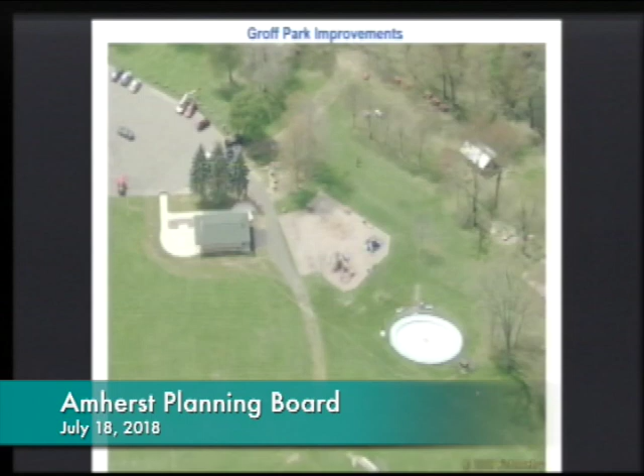The proposal is for, as Nate mentioned, in this midsection, there's the existing park building, the existing playground, and old wading pool, which has since been removed by the town. The project is basically on this plateau. Let's flip through some of these. I'm sure you're pretty familiar with the site, but one of the features down below is the old picnic pavilion, which is proposed to be replaced.

Handicap access from the parking lot is non-compliant, I'll put it that way. So part of the park proposal, wanting the playground area to be fully accessible, includes improvements for handicap parking and access.

So let's get to the plan. We'll get you oriented first. This is the existing park building, and down here is the location of the existing picnic pavilion, which is proposed to be replaced. But starting off at the arrival, we're proposing to repave this corner portion of the parking lot.

Paving for the parking lot would actually be reduced. We're going to reorient the parking spaces so that you pull in head on to the arrival. This is a small arrival plaza into the park.

As you continue up, the grade would carry you up to this level slightly. It's about a 3.5 foot difference in grade from the building back down to the parking spaces. We had to actually raise that corner of the parking so that we could meet accessibility requirements.

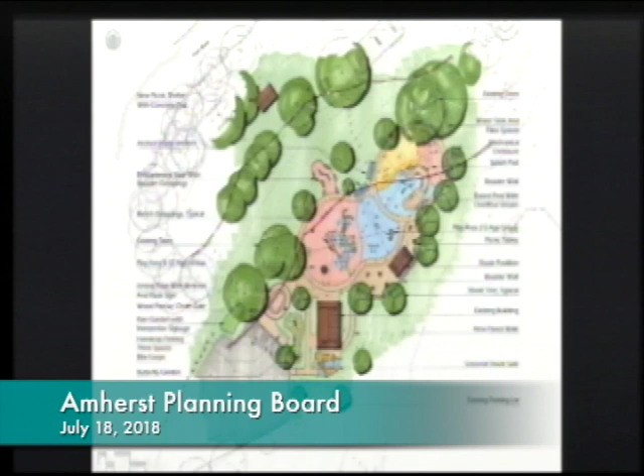And then next to it, under this tree, there's this little square, the existing sandbox, which a lot of people have said is one of the favorite things at the park. So we're really not doing anything down at the lower level except, if the budget allows, replacing that picnic pavilion, because it's old, worn out, and it's been repaired too many times.

Other questions or comments? Questions or comments from the public?

Back to the board. Chris? We received a letter from Susan Sheldon. You may wish to hear from her. We do have copies of the letter here, but I don't have enough copies for all of you, so I can pass these copies along. Perhaps you wanted to recognize Ms. Sheldon to make her comments? Yeah, sure, if you would.

Hi, I'm Susan Sheldon, and I live on Mill Lane. I'm a landscape architect, so I'm really fascinated with your project, and I have some great ideas. I love it. I also have some comments about it, but that's not why I'm here, to comment on your design. I think you might have another letter from one of my neighbors on our street, Kathy Mullen. She lives closer to the entrance to Groff Park, and since she kind of spearheaded disseminating this information to our street, I'd like to read her letter, if I may.

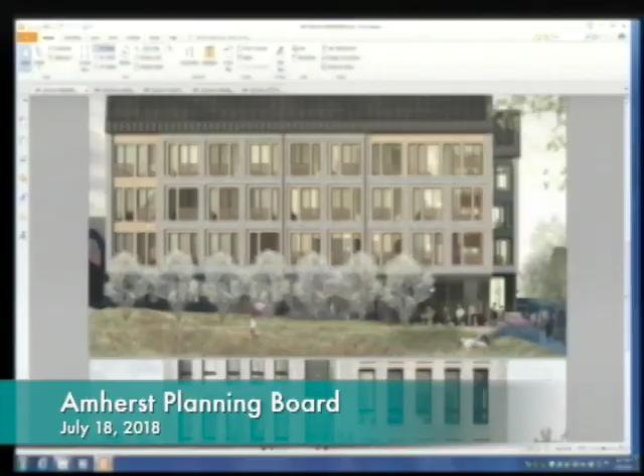The building inside, I'll stay here for a minute and then I'll go inside. So this is the grade, this is the south elevation at pedestrian level. So this is the lobby entry, which shows a fireplace in the lobby. Again, that's at 290. These are steps up to the retail, again at 293, up to this space.

And then this is the outdoor portion, the patio. We have pushed this portion of the bar back further so we can plant against this patio, and doing so allows us to eliminate the need for a handrail that would have to be at the street side.

And then we've tried to take the granite wall that was installed at Grace Church when the town lowered Spring Street, and take something similar across the face of this, which is a granite veneer stone that is a landscape wall in this location, and turns into an architectural wall, a veneer on the building on this bar here.

This is the site plan from above, showing the photovoltaics on both the east and west portions of the roof, everywhere we can. This is showing our building coverage, and this is showing our lot coverage.

The building itself has changed in that the number of units have gone from 38 to 58, and the unit types have shifted. This is our first floor plan that starts to show some of those units and shows our lobby, package room, stair, elevator, fireplace, the retail, which has grown a bit from the currently approved plans, a fitness center, and this is kind of the back of house that then takes you out here.

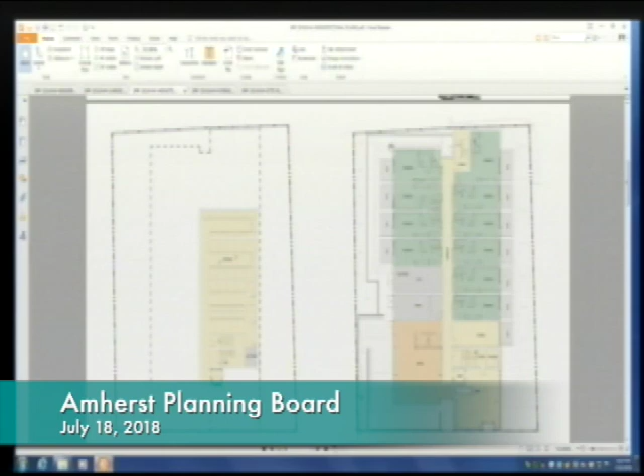So let me try this. This is the egress out of the second stair, which is now coming around the west side of the building and wraps and comes down to this stair.

So the shift in the units has, as you'll see up here, we have a number of one-bedroom units. We have 6 one-bedroom units that face the street, and we have 52 studio units that are of different sizes depending on where they are in the building.

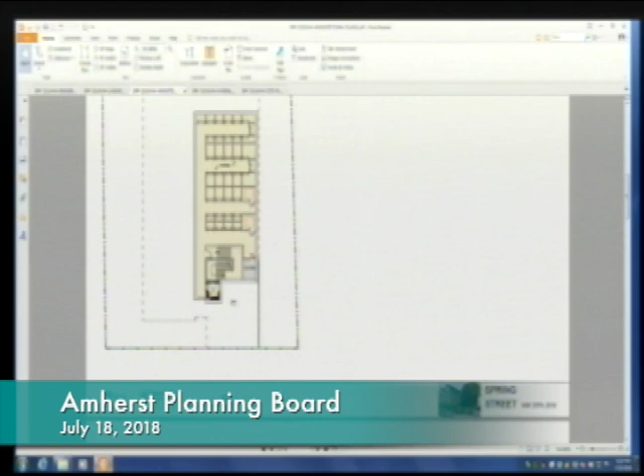On the ground floor, we have gotten rid of the parking that was previously shown below, and in place of that is storage for the residential apartments. The patios outside of all these ground floor units are shown here on the sides, and that takes us up to the building and lot coverage calculations, which are shown here and included in our application.

The total building coverage is 63%. In BG, we're allowed 70%, I believe. And the total lot coverage is 76%, where we are allowed 95% lot coverage.

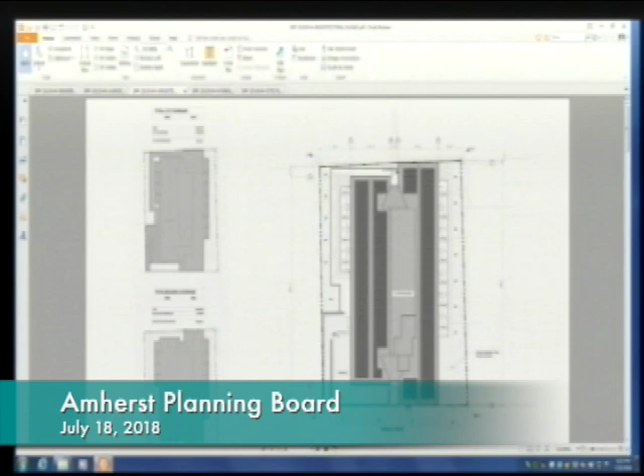The setbacks, which we have discussed with planning staff, the building setback on the street is a 0 setback. There is an eave up at the roof that will project over the property line, and a canopy at the entryway, which we'll have to reconcile with the select board.

On the back, this back corner is a 0 lot line to the face of the building, and what we are going to be doing here is we are not going to have an eave on this back bar of the building. So that will be flush all the way up, so that zero setback is a by-right condition in the bylaw.

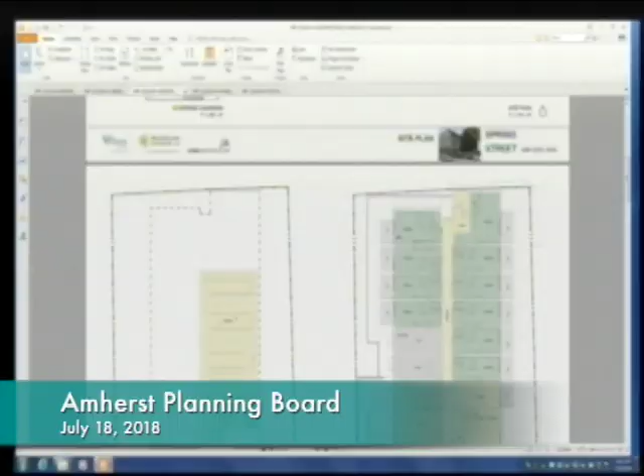The upper floors, you'll see this is the first residential floor. Let me go back here so I can clarify this. This lobby is the 290 condition. This retail is the 293 condition, along with the back of house, side of house here. And then the 296 condition is this entire corridor and these units, including the fitness center, all up at 296. So those are the three slabs that work together.

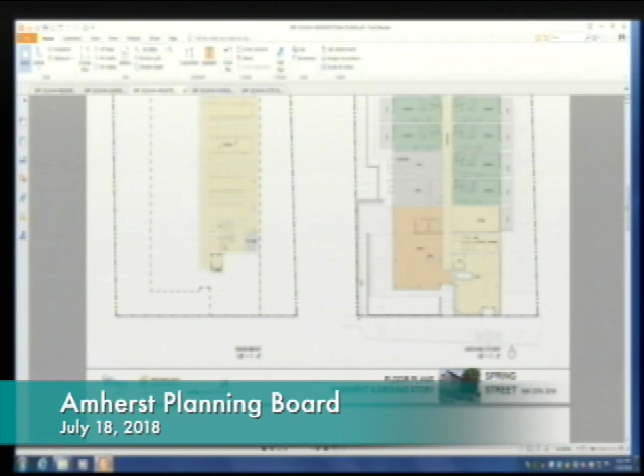The third and fourth floors are identical. The second and third floors are identical, and this is the fourth floor, and as I said, we've gotten rid of the fifth floor in this proposal.

So on the roof, you'll see the gables here. It's a 12-12 pitch, so it's a 90-degree angle at the top of the gable. That same 90-degree angle, with the 12-12 pitch, is represented on the roof facing the street and the roof facing north, and what that does is creates a well for the mechanical system: the generator, if needed, the fresh air ERV, HRV, and the condensers that would go with the split units that heat and cool the building.

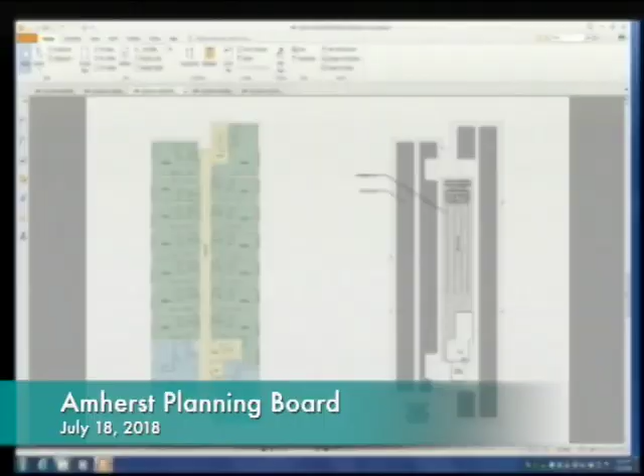There is an elevator overrun here, and then the hot water is either going to be tucked into this penthouse or in the basement, all electric hot water.

These are the rendered elevations. You'll see this is the south side facing the street. You'll see the materials called out where we've got brick that we brought a sample of, cedar, fiberglass windows, a standing metal seam roof, the storefront system, and the height is represented as 56 feet 3 inches to the midpoint of this 12-12 pitch. That is from the average finished grade at the street at Spring Street, so we've shown that in all locations.

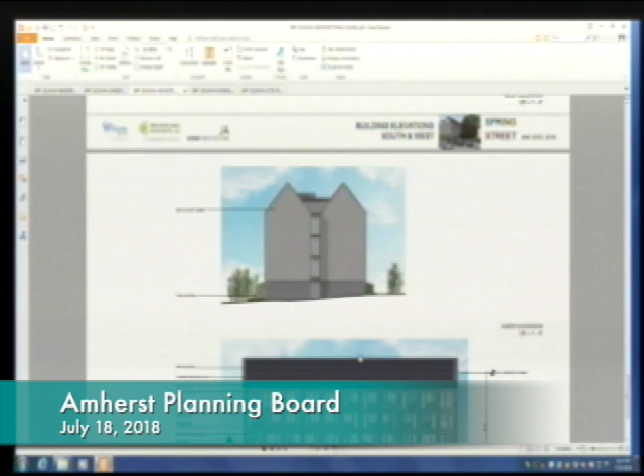So you can see we've been able to integrate plantings on the east side and plantings along the west side, as well as plantings in between the units on the patios. The west facade shown here, you can see that big grade drop-off from the back of the site all the way down to the street. You can see the north facade, which is zero lot line, and then the east facade, again with plantings and the patios.

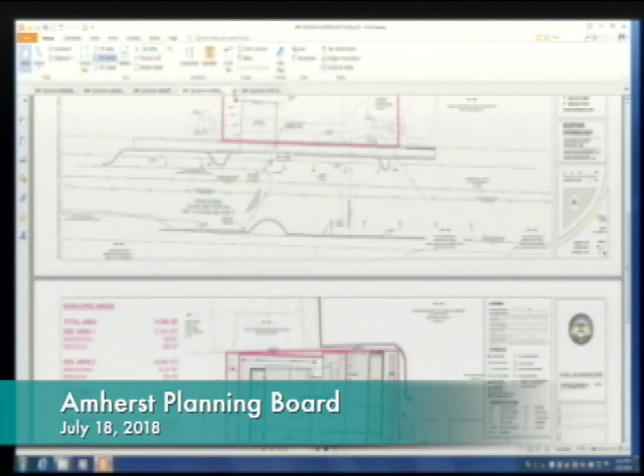Let me go to landscape. So here is the landscape plan. The landscape plan shows what we're able to do

by eliminating the dormers. The currently approved plan has integrated downspouts in the wall assembly, and we've brought those out and exposed them, and we're going to actively work to try to integrate the civil and the landscape to use these planted areas as a swale on this side, and then for our retention on the west side.

So we've got a swale along this east property line that's planted, that drops all the way down here where the grade drops again down to the street. It's planted here along the street side and planted here. That same planting is brought over.

We've got a paver that would be similar in color and material to the granite landscape wall, with a running bond pattern that brings you up the ramp, and an area for potential outdoor seating for this retail. It turns into a concrete walkway for the egress path out of that back door, and then the planted shrubs along that west elevation.

This is an outdoor lighting plan that shows the integrated lighting on the retaining wall. That's all down lighting in the wall that would provide the required foot candles for the egress path outside, and would also be in this grade height retaining wall along the ramp, facing west.

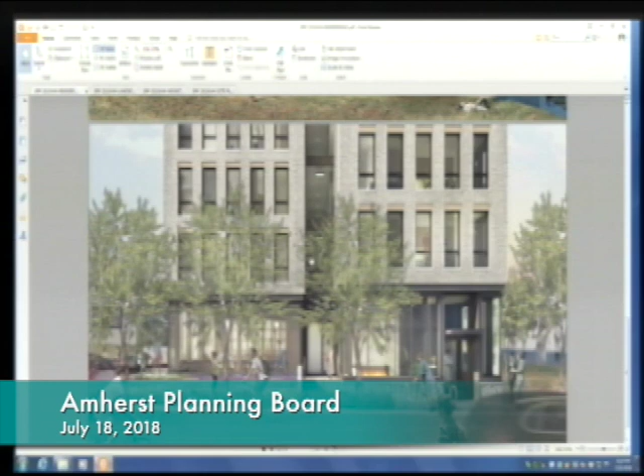Another thing that we spent a bunch of time on this iteration is looking at this corridor. The corridor for floors 2, 3, and 4 is open on both sides, on the south and the north. And one of the things that we're noticing in the buildings that we're constructing now is those corridors can become almost too bright. In a situation like this where it's open on this end, we wanted to see how far we could take that.

while still meeting building code and egress requirements. So we've looked at a darker interior finish and then a lighting program that's going to allow just above the required foot candles for the egress and corridors up above, and then lighting at the unit entries for the doors, so that if any of us walk past in the middle of winter and look up, this is not as bright as the lights that will be coming from residential units.

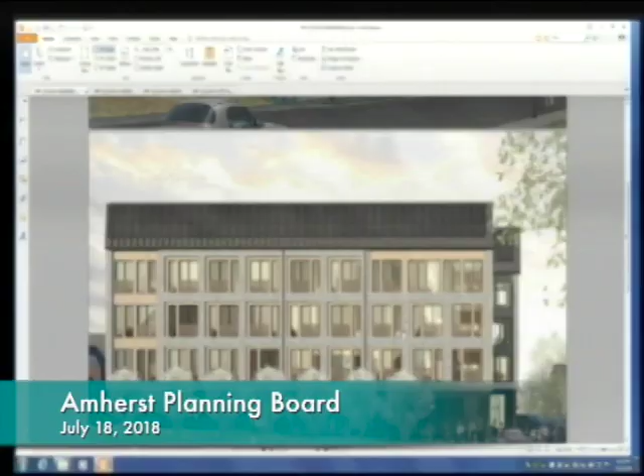Let's see. Civil, so this is the existing condition. This is showing the bounds of the property here. This is the retaining wall when the new police station went in that was put on the property line.

The little shed that the police station has is in this location right here, on the police property to the north of that retaining wall. This is, what's the name of that? Parish House. The Parish House at Grace Church. That is to the west, and this is the Jones property to the east.

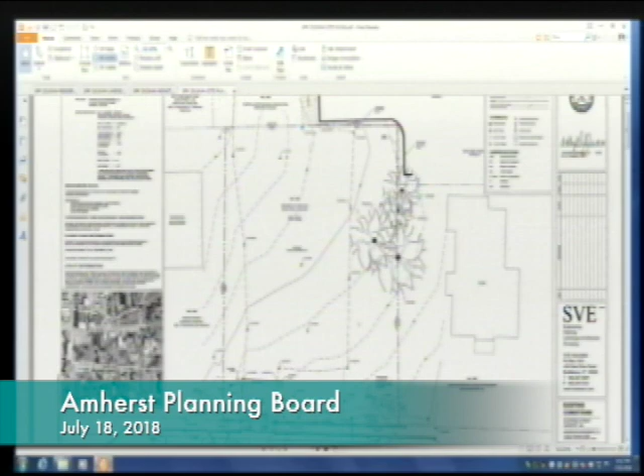These are the trees that we have previously discussed in coordination with the ownership here. This one is ready to come down anytime. With this new plan, without the underground parking, we'll work with them to see if they're interested in preserving any of these trees, because there's an opportunity to potentially preserve those since we don't have to excavate for the foundation as close as we did previously.

This is showing the proposed site plan. I'll go to the utility plan. That is showing grading and utilities, where we're going to have to work with DPW as we've done in the past to tie into sewer lines, to grab the water lines — there's a hydrant that needs to be moved.

Moved from on the property to the right-of-way. I believe all of those are addressed in the letter that the town engineer submitted, and we're showing this proposed public right-of-way improvement that would integrate the storm, potentially integrate stormwater connections.

I did bring one of the things that was brought up at the design review board last night, which was context, and that's what I have on this flash drive. I have a couple of printouts here that I could give out.

We've submitted these previously, but they're the 3D Google images that show this block and our approach with this building, with the gable roofs and how it sits on the site, trying to be in keeping with the larger buildings on this block — this building obviously being one of them, Town Hall, the police station, Grace Church.

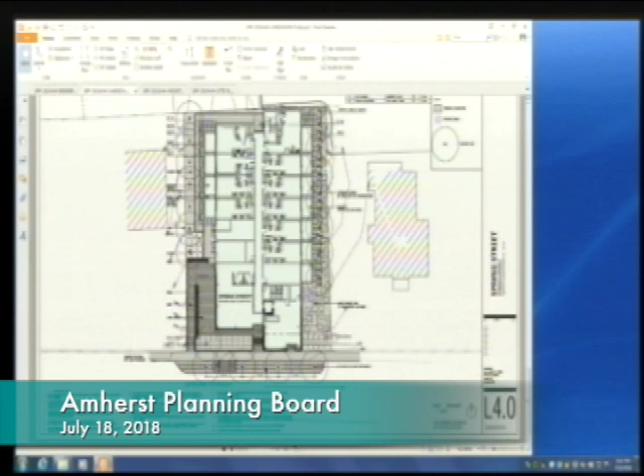So you see where the sidewalk is, which is public way, but then they're asking for more public way to make a big bump out to plant green, but you lose 6 or 7 parking spots. If you got rid of the extra bump out, you could still maybe configure or use just a little of it and get a couple trees, but I'm also proposing they have a new design where they put a tree in the green space on their terrace.

I think there's a couple of different options that can be done. But I definitely think all of us would like to see the wires come down, obviously. Of course, but I think the trees are still open to other options.

And just to be clear, the current condition has a driveway, so there's no... this is the light pole, this is the other light pole. So this is the property line, this is the property line. What we're talking about is there are 1, 2, 3 parking spaces that we're talking about removing.

If the poles came down, there's a chance to be more efficient in the parking, because some of these spaces are really long, all the way from this curb. I don't think you'd reduce the grass by Grace Church. I don't think that's another way to pick up parking. I don't think that's being proposed.

But if you wanted to get as much parking as you could, you would eliminate everything from the sidewalk into the street, all the way from Boltwood down to Churchill, and you could probably pick up a number of spaces. If you left the curbing that's here and just took it from here down to Churchill, I agree there's efficiency to be had in this run, where you could probably get 3, and over here you could probably take that 6 to make it 8.

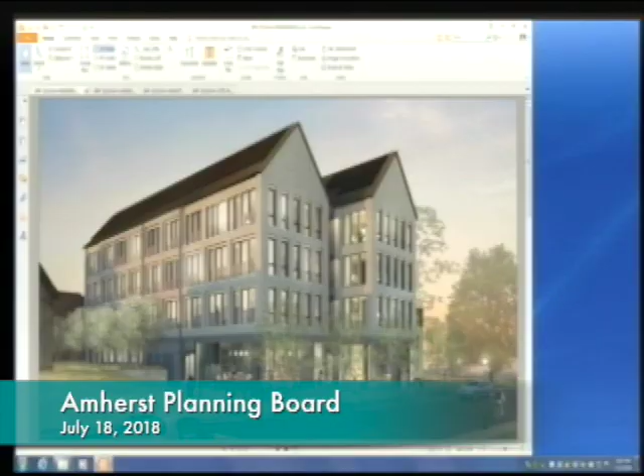Are they like just pop out, or are they sliders? So the windows are, per code, these windows are all operable, and these are railings, so they slide open. It's a slider. These windows, per code, have limiters - they're only able to open 4 inches.

Okay, so people don't fall out. With all new construction, that's just the way you do it above the second floor. And that's why we have these Juliet balconies that you can't occupy, but you can open.

What else came up? We do have the design review board. I was going to say, we don't regulate ugly, but we do have the design review board as an extra set of eyes that's advisory to the planning board. So ugly's in their purview.

I might have a different view of what's beautiful and what's ugly, but I much more enjoy the walk down Triangle Street now, since I live close to the Triangle building, than when it was a weed-filled lot. I walk down Spring Street all the time, and right now it's a bunch of gravel lots.

Can I ask - I know it's a different building, but right now you're trying to lease 1 East Pleasant. Do you get many undergrads, or is it mostly grad students or completely unrelated people? And you had 36 spots there - how is that renting?

We have 36 parking spaces, the same as when the Carriage Shops was open. And we have 136 apartments - 135, excuse me. There's a leasing area. We're over 100 leases right now, and we still have parking spaces available to rent, of those 36.

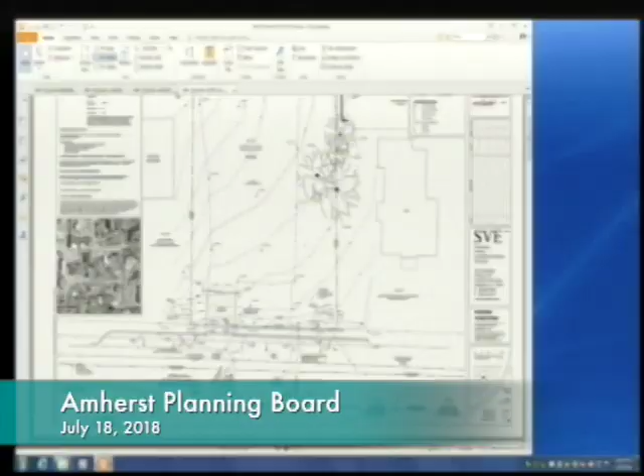Looking down Spring Street or up Spring Street, depending on which way you want to go - basically a cross-section, I would take it through. A cross-section of that, Lord Jeff, even though it's not directly... a section down Spring Street starting, and then a section down Church going longitudinal, a cross-section showing how the buildings relate to one another. Yeah, so effectively, this one here would go across Spring Street, and this one here would show all of Spring Street.

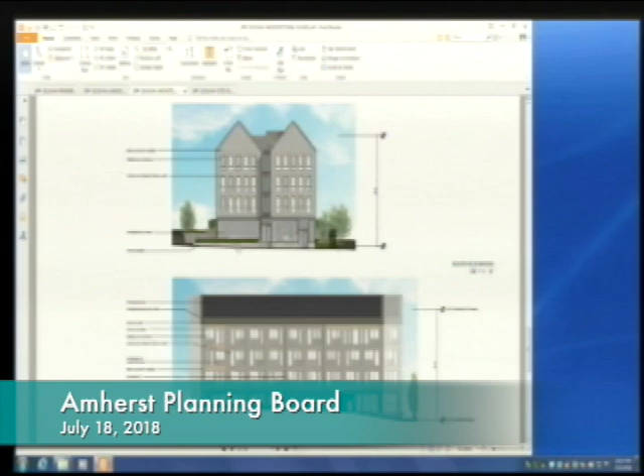Who comes up with the estimate of putting the utilities underground? When does that happen?

A number of years ago, Mr. Mooring came up with an estimate of about $500,000 to do that work. I think that was prior to the work on Spring Street having been done, so there's already conduit in there and already structures. We're just not sure if they satisfy the latest needs of Eversource, so it has to be explored again, but it may be as much as $500,000. I think it would involve an extended conversation with Eversource, Verizon, and Comcast, and in my experience with them, often that doesn't happen until there's a work order filed, and you don't file a work order until there's a project. So there's a likelihood that scope is determined after a project begins - that's going to be something juggled during construction, as we're asking for loads for a transformer that would feed this building.

The Verizon and Comcast are a little more straightforward.

So just looking through the notes, parking's come up a lot. I think it'd be really useful to have a written document showing how you'll make recommendations to your tenants about how to find parking - like where actually will they park?